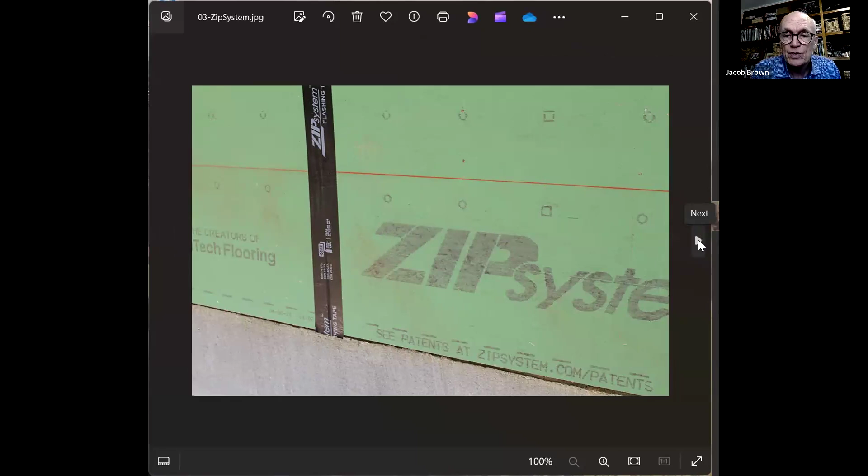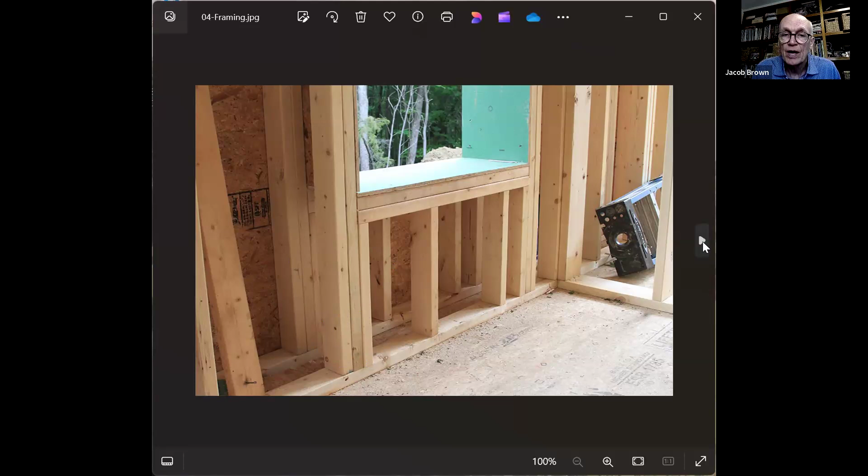The other thing is that the house in Vermont, with new construction, used a double wall construction, two sets of 2x4s with a 4-inch space between, basically a 14-inch thick wall to get a lot of insulation. Those walls were filled with cellulose insulation, and it created a very airtight house and very well insulated.

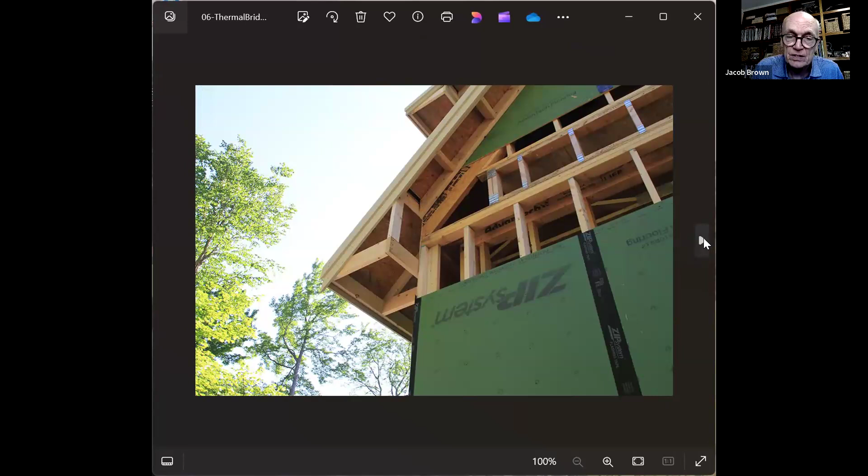I show this picture to illustrate the idea of what's called a thermal bridge. This will be something we talk about a little bit more, but if you've ever watched a house go up, the roof rafters come out and create the eave. But in an envelope house, you cut them off here, put the envelope in place, then you build the eave separately and bolt it in place. Allowing wood to go through the envelope is called a thermal break or a thermal bridge. In passive house construction, you work very hard to prevent those thermal bridges.

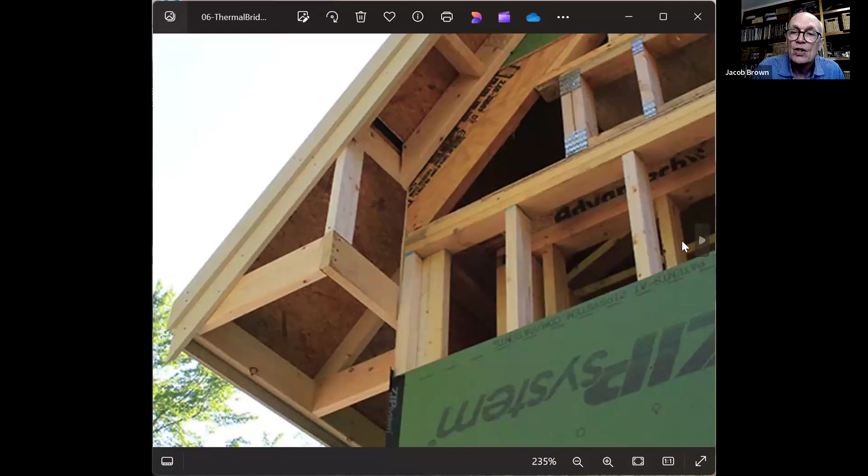The windows are triple latched and triple paned. The doors are the same. The foundation of this house was a prefab built in the factory, so to speak. And this is simply an amazing process. I got to tell you, these guys put this up. They had it all staged.

They'd come the night before to make sure the footing gravel was in place properly. They got there at 7:30 in the morning, and they were taking bets with each other whether they'd finish before lunch. And they finished by about 11:45. You could have started the next phase. It was just an amazing process to watch. These have 6,000 pound cement, so they don't need separate waterproofing.

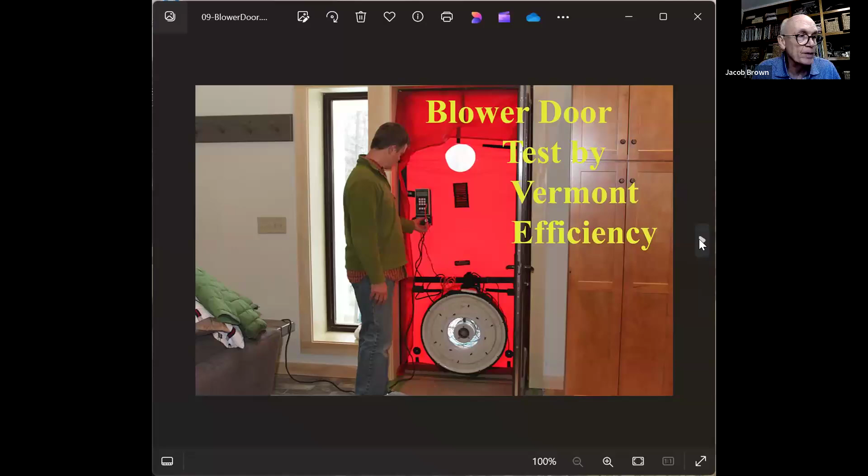We did very well with the blower door test. If you don't know about the blower door test, you might ask me some questions about it. It's a big part of efficiency houses, having a blower door test that does well.

The other piece of it is that it's got to have an energy recovery ventilation system. Zehnder makes the one that we use. It's a Dutch company, and I consider it part of the family. So I say, hey, the Zehnder is really working hard today or something.

It exchanges fresh air from the outside and takes stale air from the inside. It exchanges it in this box, which is almost the size of a washing machine. So the air temperature is then equalized, and you lose very little energy. If it's warm inside and cold outside, the fresh air is heated from the warm air inside. It's basically a thermal exchange. They say inside here is about a football field size of surface membrane to make this exchange. So Zehnder is a big thing.

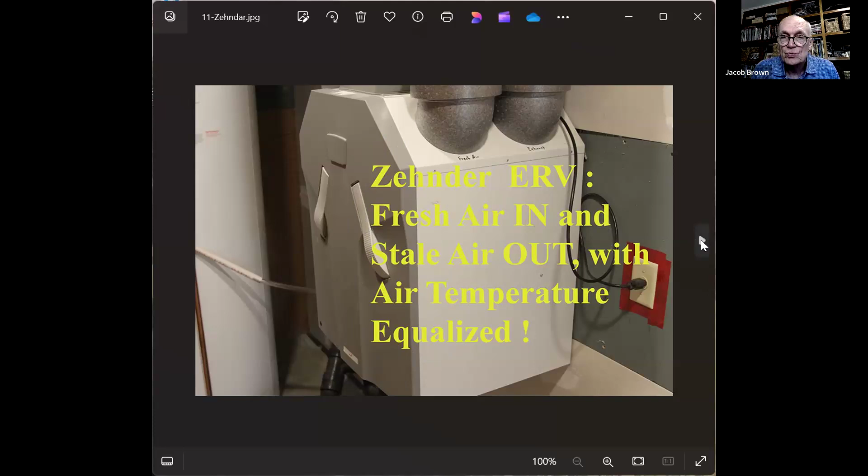And of course, we use solar panels in Vermont to make most of our electricity. The other aspect of the Vermont house that is notable is that it's an open concept house. This is very much different than what we were challenged with in the 1928 Colonial, because you don't have open concept houses. With the open concept house, it's much easier to manage air and have things work well.

Just to go back to Vermont, there's my mom and my dog sitting. What you don't understand until you live in the house, because you build this house and think, hey, it's a neat house, it's going to be efficient, it's going to save money. You live in this house, and it is so quiet because of the thickness of the walls. The air is so clean and the house is so fresh, and there are no drafts in the house.

It can be 10 degrees outside, the wind is going 10 miles an hour, and you're sitting in there having a glass of wine and cheese and crackers, and you don't know it. There's no drafts in the house, zero, none, nada. And we've experienced minus 23 in this house, which I'm not going to go too far into, but it's amazing how well this house performs.

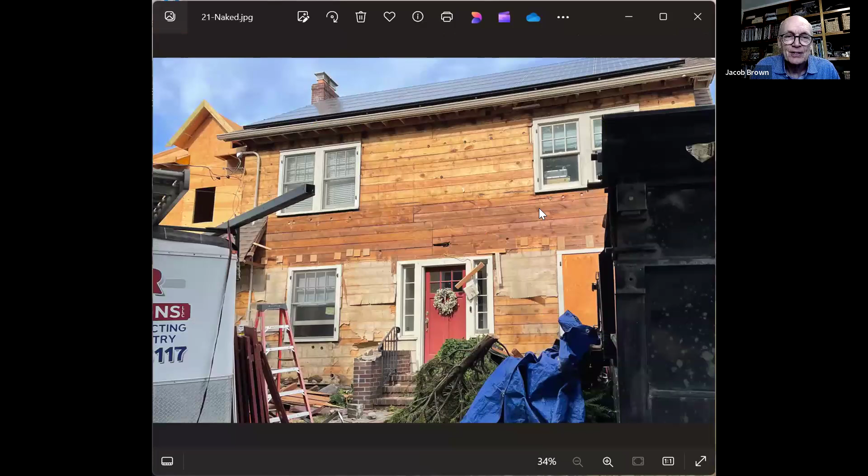we stripped it. You strip everything off it, because in the 1928 house, you make a decision, you're not tearing it down, so you're going to leave the bones in place. You're not going to change the framing like we had new framing in Vermont. So what you do, you strip it and you add the insulation to the outside of the house.

Our house is basically all the way around about 6 inches fatter than it was at the beginning of this process. So you strip it, and notice that it had a nice skirt around it here. See that? And that's gone. And then we wanted the same house back, and this is what it looks like today. It used to look like that, and now it looks like that.

And this might be a first place for a pause for questions if you want. The rest of the talk is going to talk about the process of what it took for us to go from this through that to this. So a moment for a question or not?

There are no questions in the chat, but there's one comment. Christian says he believes that Zehnder is a Swiss company. It might, you know what? I was always told it was Dutch. I'm not sure. They have some competitors out there, and maybe they make them both places. I could be wrong.

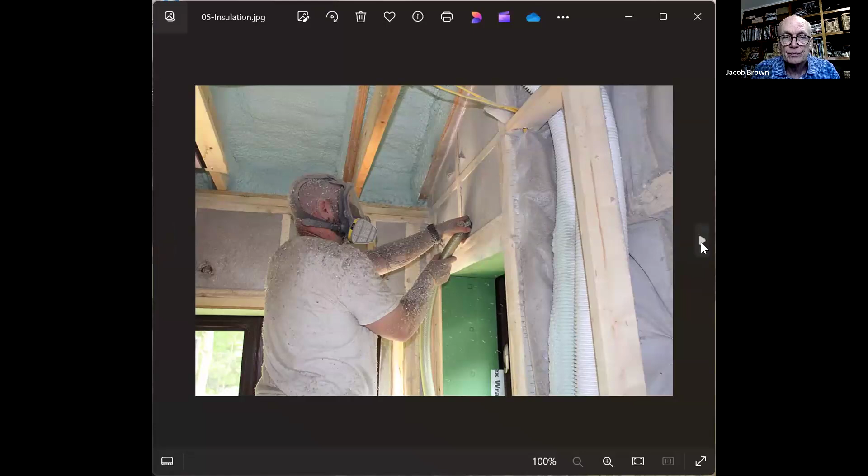Then they came in and slid them like this, and then they pumped the air in from the big truck they had outside. So yes, it's packed: 2x4, 4 inches, 2x4. It's packed with this cellulose. It's quite remarkable, actually.

Brian asks, did you use mini splits? Yes, they're in the Vermont house, 2,300 square feet. We have 5 mini splits. Yeah, and they're ductless mini splits. What ended up happening, we have 2 compressors with this system, by accident, since we were going for Vermont efficiency standards, and we built this in 2015.

At the time, Mitsubishi's compressor that would fit this 5 mini split system wasn't certified to meet Vermont efficiency. So we split it. We bought 2 smaller compressors that met the Vermont efficiency standard. So we got 2 compressors up there. They're still real quiet, but we have 5 mini splits, and they heat and cool. We never use the cooling up in Vermont, but they heat the house nicely.

Robert asks, and I've wondered this myself, with mini splits, how do you heat the bathrooms? That's a good thing about passive house with the air management, because air is exhausted out of bathrooms to the Zehnder, because bathrooms produce the humidity and the smells. So you want the exhausts to go out of the bathrooms, and then the fresh air comes into the bedrooms

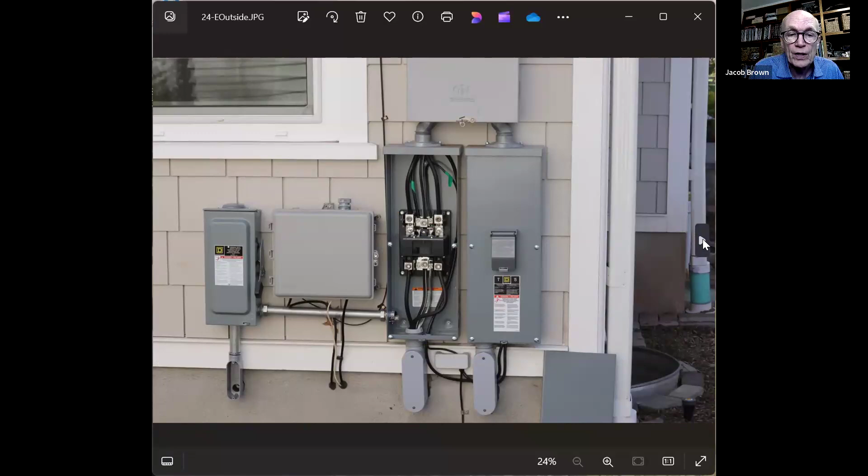I put this in first just to recognize the fact that we went all electric. When we did the project 2 years ago, my electrician couldn't get a 300 amp panel, so we put in 250 amp panels. We probably could have done with 200, but he said, in the future, we already have one electric car. We'll probably get another one. At any rate, that's a recognition that this is an electrified house.

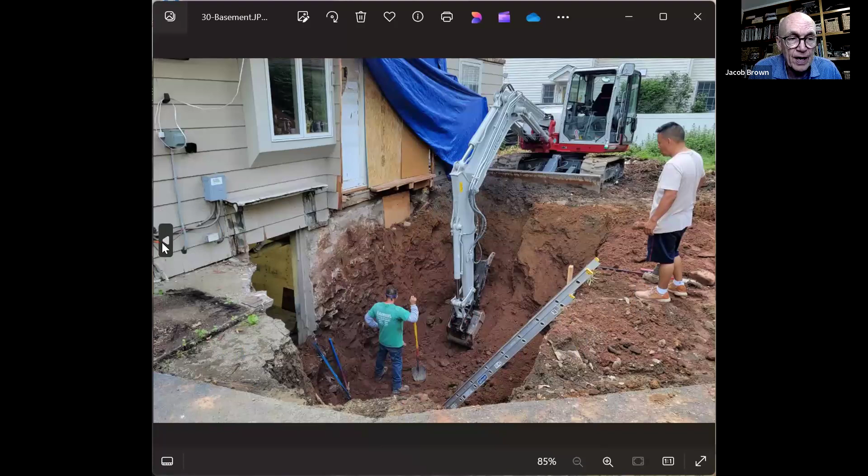And my wife, who's a big cook, has adjusted and actually likes this induction heat surface, so we cook without gas. Now, I'm going to start with the basement. 1928, this was where our problems became interesting. Let's put it that way.

So we renovated part of the house, put in new systems, and we also added to the house, but then we retrofitted the house. We added to the back a little bit, but one of the things to look at, oh wait, I'm sorry, I'm going too fast. We'll come back to this wall. I want you to think about and remember this wall. At any rate, we did the basement.

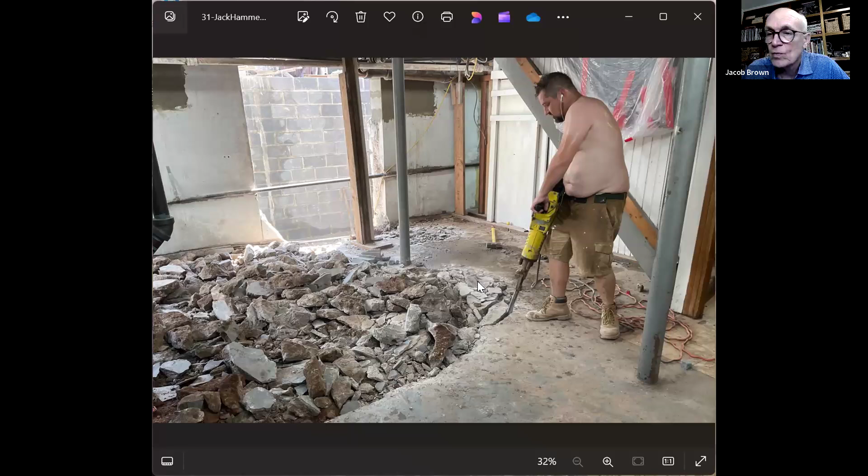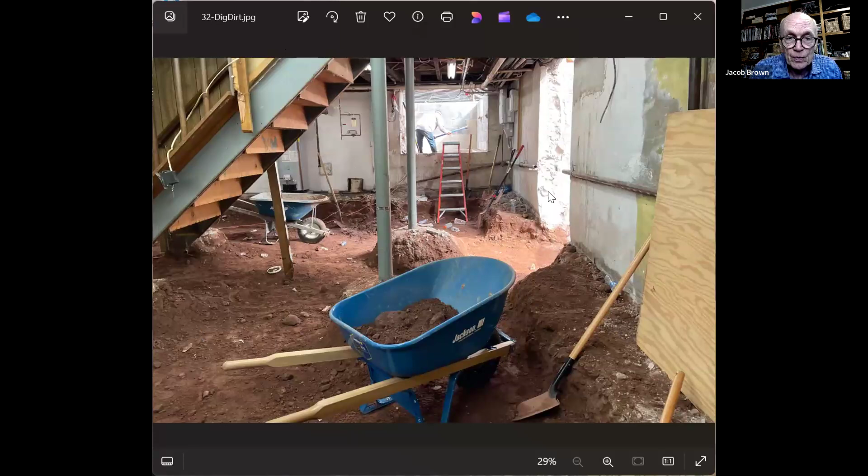Now you find when you retrofit a basement in an old house, you basically have to tear it out and dig it down because there's not enough space to put in the 6 inches of insulation and all you have to do. Fortunately, my contractor had experience in this, and you do exactly what you might think. You jackhammer the thing, and unfortunately, due to the size, they couldn't get a machine in here to dig, so they dug it by hand. His guys were amazing. They dug down by hand.

They found underneath the old floor from 1928 this 4-foot Texaco sign. This is like 4 foot in diameter. It's pretty crazy. It's too bad it wasn't in better shape.

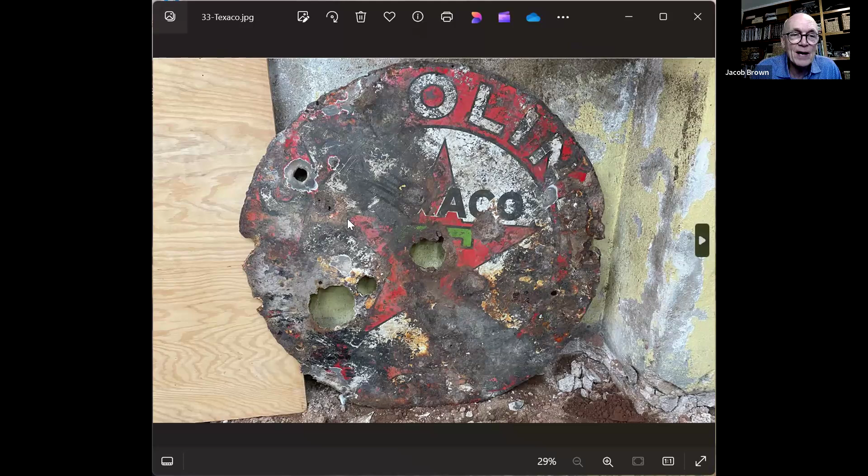Now, one of our first surprises, and maybe the biggest surprise, was that we discovered that this clay, the dirt around the house, is a very firm clay. And the contractor in 1928 basically dug the clay straight down and used it as a form. This is a poured cement foundation, and they used the clay as a form. So what we had was this

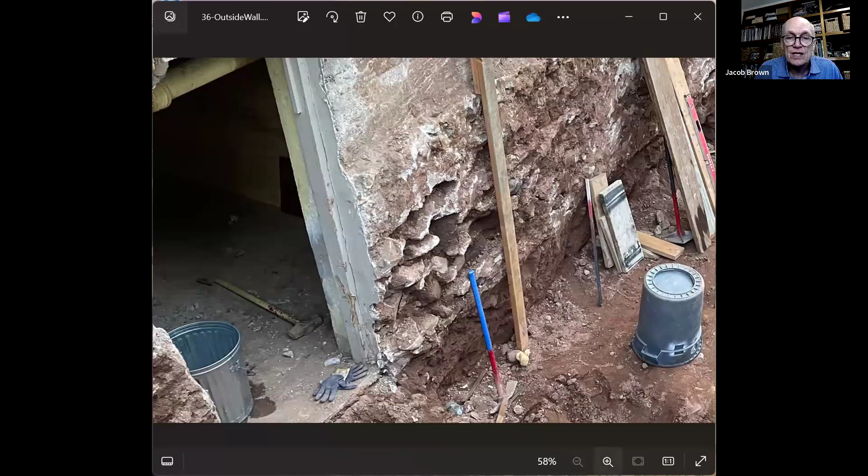part of this wall is just pocked and not very smooth, and will create, as you're going to see in the future here, a real problem for us trying to get the envelope. They also don't have a footer. Notice that. There's no footer. They just plopped the pour on the dirt. Now, the dirt was very firm, but that was all interesting. So you can see that having such pock holes, this was a challenge for the crew.

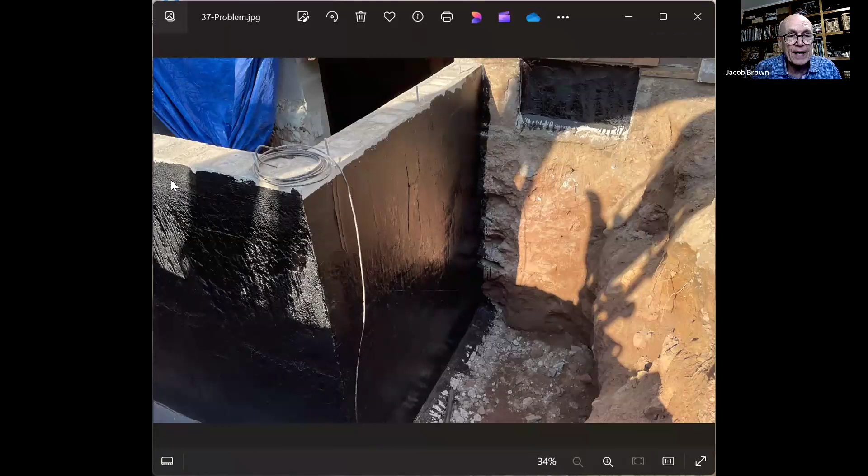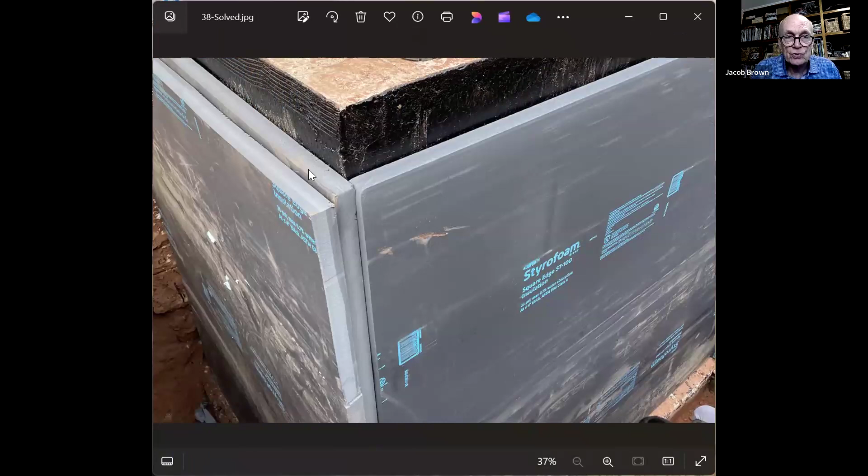What we did when we added to the back of the house, we added a new entryway. So we did that the new way, blocks and tar, and then we tried to blend it with this wall that had all the holes in it. Now, passive house is you tar for the envelope, then you insulate. But where we had all those pocks, holes, we had to pour foam. They poured so much foam in there, it was nuts, to try to make up for that space.

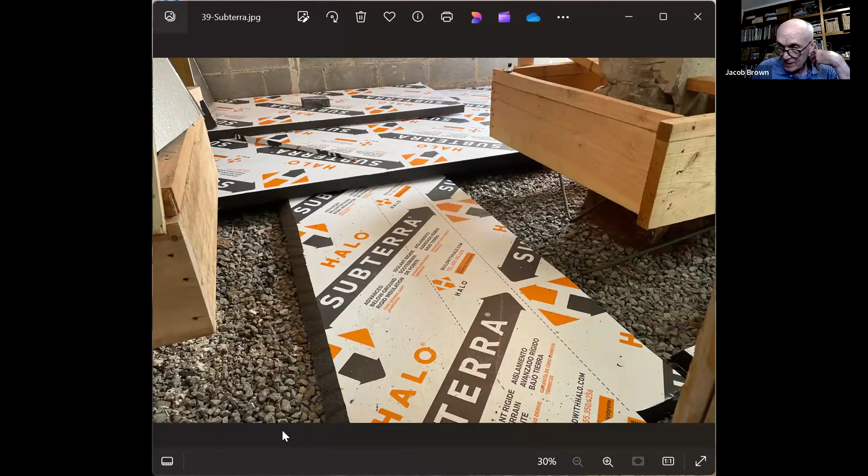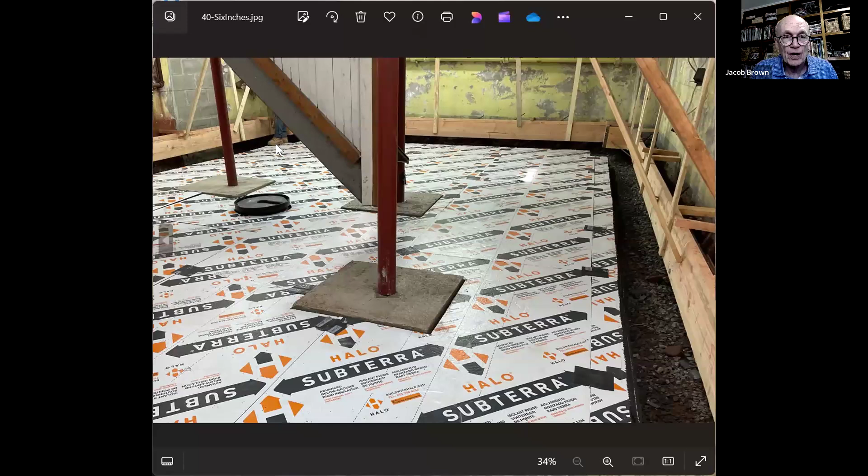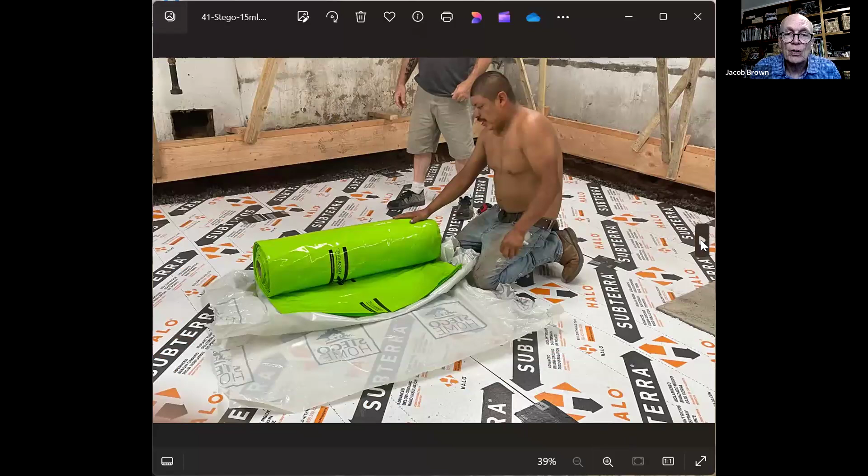Now, once you dig the basement down far enough, you got 6 inches of this Subterra insulator board. 6 inches of this, 2, 2, and 2 on top of your slag, or your stone. We had to do footers for the supports, and because we had to dig below the old line of the poured foundation wall, they basically created a swimming pool for the foundation pour. But before doing that, they needed to do the envelope.

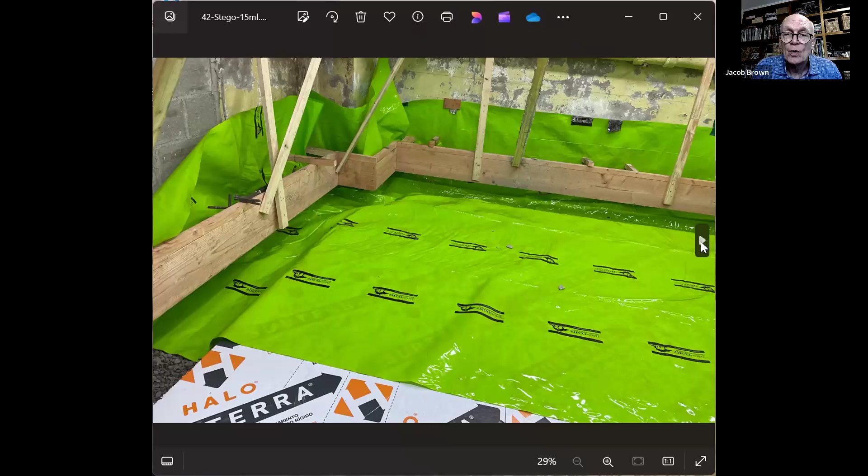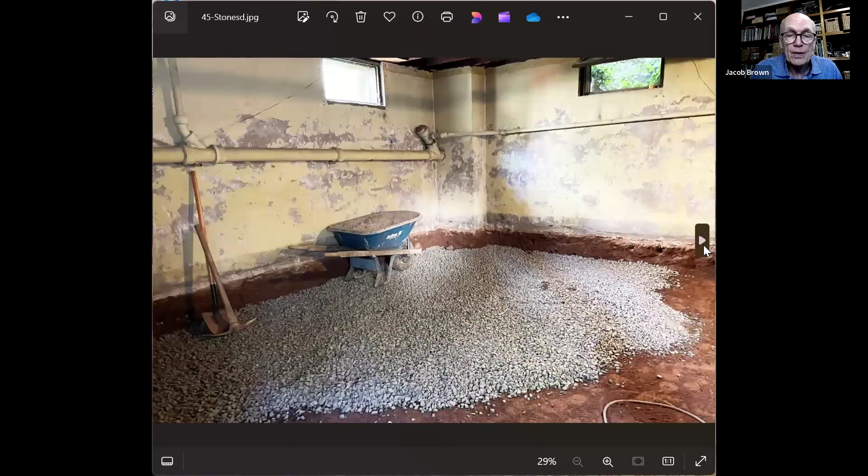So we had this 15-mil Mylar. This green stuff is 15 mils thick. And we basically created a swimming pool with this for the concrete that was going to be poured in later on. And this creates the airtight envelope with the insulation, and then do the standard basement with rebar. And I put this in out of order. This picture should have been a little earlier, but obviously had to have a stone foundation. And then they did the cement pour.

And again, in this small, tiny space, your contractors who do this have to know what they're getting into, because this was a lot of hard work. These guys really just busted it that day. They worked so hard to move this concrete around, and then had to smooth it out and all of that kind of stuff.

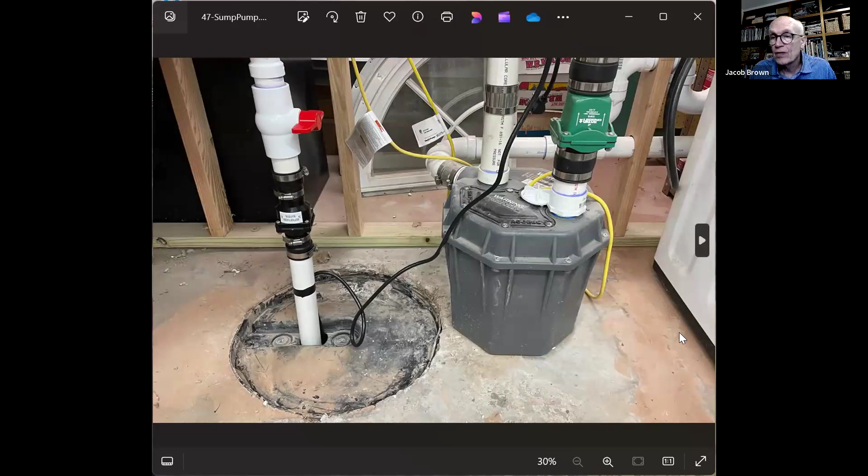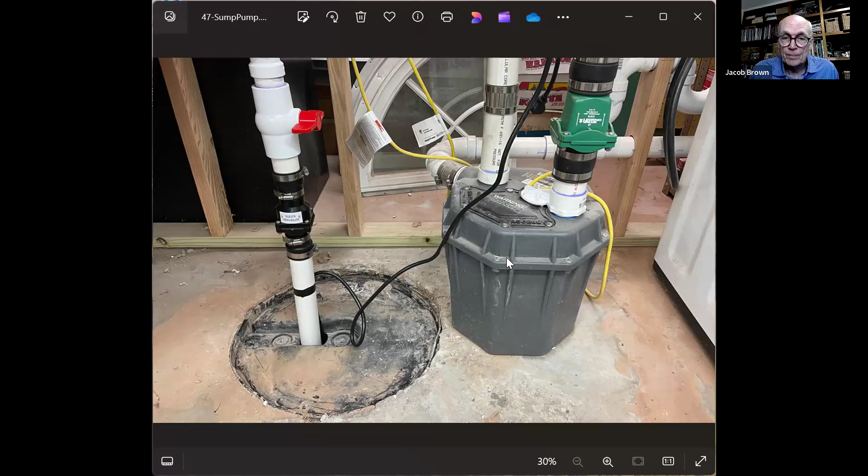The other thing about my old house, and this is an important thing that people need to think about moving forward: this house was below grade from the town sewer system. So it needed to have a pump if you have your laundry down there, which we wanted to do, and we needed a sump pump. We'll talk about sump pumps later in terms of passive house, but this was all because the house was below grade, and part of that was getting rid of the water. So we have all the

downspouts, and this house basically has a higher backyard, and my neighbors behind the house are higher yet. So the water from a good rain will run down to our backyard. And I've got drains in the backyard that also connect to the downspout drains. And when we have a good rain, we have a good bit of water coming out of the pipe in the front of the house. So that's something else that people need to think about.

And since we lived there, I knew all about this water issue moving forward. But if you have a property where, as they say, the drain pipes can go to daylight, and you don't have to do the below grade equipment, it makes life a lot easier.

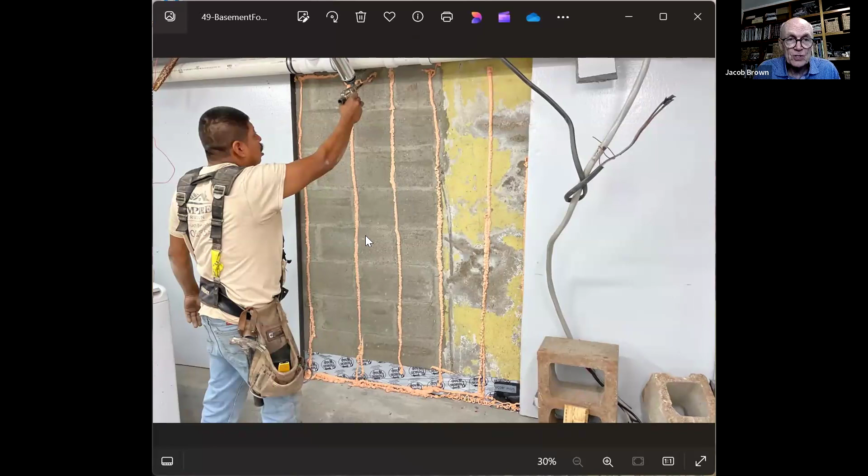Then once you've got your basement floor done, you're going to also insulate that wall. You got it insulated on the outside, and you had a 2-inch foam board on the inside. Okay. So this gets people thinking about the basement, okay?

And I thought, didn't we say I'd take a few questions at the basement time, if you want, before I go to the walls of the house? Or should I just, what do you think? I don't think we have anything. Okay, all right. So I'll do the walls now, and then people can be thinking about it.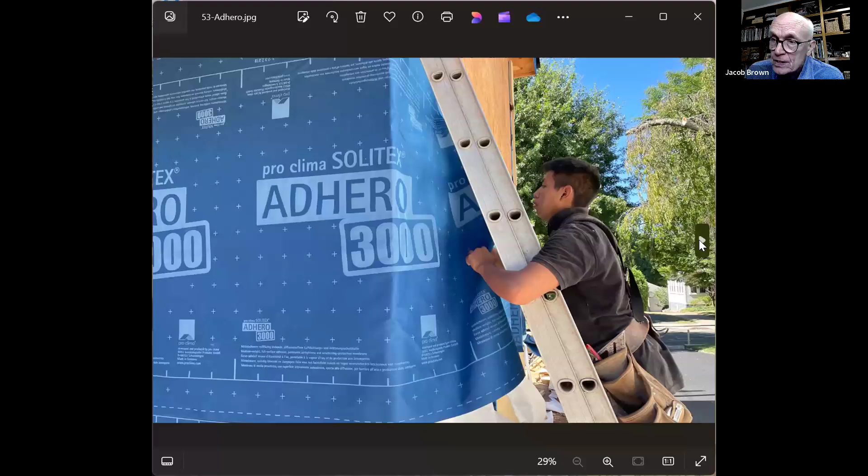And then for the envelope, and this is different than what they did in Vermont. Remember, they used the ZIP system of plywood that's basically airtight. Here they use a material called Adhero 3000. It's pretty thick. It's glued on a backing, and you strip it off, and then you put it over the house. You basically wrap this house in this material called Adhero 3000. It's quite impressive. It's pretty thick.

And it was hard work for these guys, in order to take the backing off and then smooth it out all over the place. It was really quite interesting. They worked hard, and I just watched and took pictures, but they were working hard to basically wrap the house airtight. The idea is we're making this house airtight with this blue Adhero.

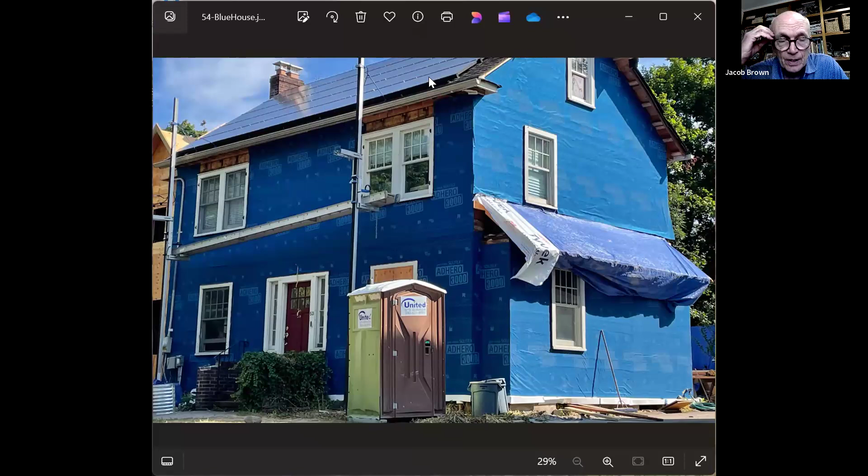Now, at this point, we hadn't changed the windows. These are still the old windows and doors, and we hadn't pulled the roof off yet. As an aside, I had solar panels on this house since 2010. And unfortunately, as part of this process, I had to have the panels taken off, and that's another whole story. But the panels had to come off, but we haven't done that yet either.

The other thing to notice, for people who are curious about this, wait. Notice my eave here, right here. And if you remember, I showed you an eave from Vermont where they tacked the eave on, they bolted it on and didn't have thermal bridges. We didn't do that here. I'll talk about that later, but this shows that we left the old eaves on here, although we pulled the skirt off here.

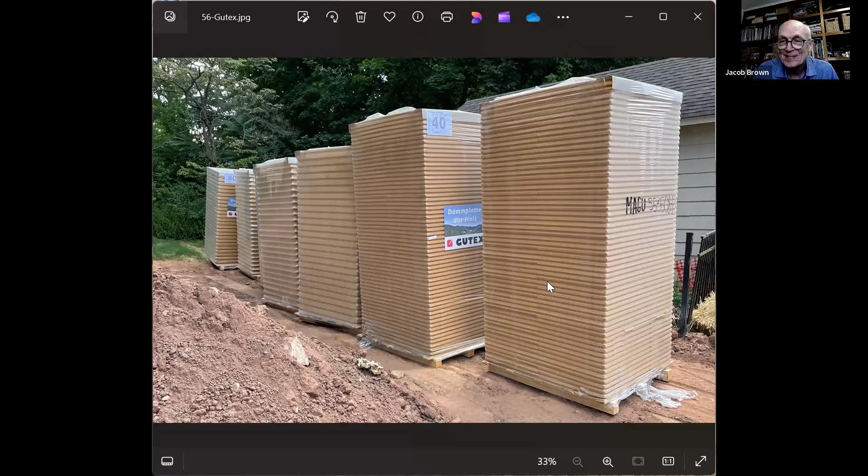So now we've airtighted the house. Now we got to insulate it, and we use a product called Gutex, which is a wood fiber product. And insulation takes a lot of space. You should have seen bringing it in on a truck. This wasn't very heavy, but boy, it took a lot of space. So they brought all this Gutex in, and they wanted 5 inches. So they had 2-inch pieces and 3-inch pieces. And basically, it was putting a big jigsaw together on the house for the workers who did it.

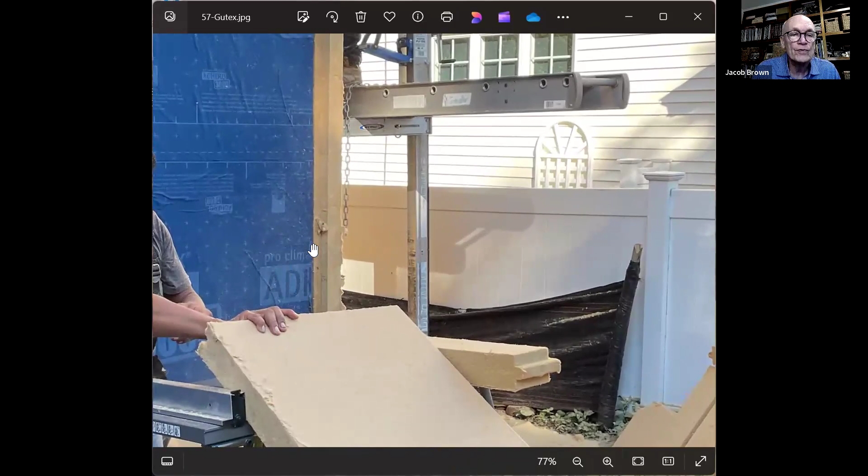And again, there's Feliciano working. Sometimes they'd have to cut it and get it just right. Here's kind of the corner of this construction, but I got some other pictures that'll show how that looked.

Now, one of the things we discovered that we hadn't anticipated was that we wanted a certain shingle look with Hardie plank, and the energy model said we'll put furring strips up and put the Hardie planks up. Fine. Well, Hardie planks can't go on furring strips, we discovered, so we had to put another layer of smooth plywood on the house. So the house got kind of doubled up in a way, because it needed a smooth surface to look okay.

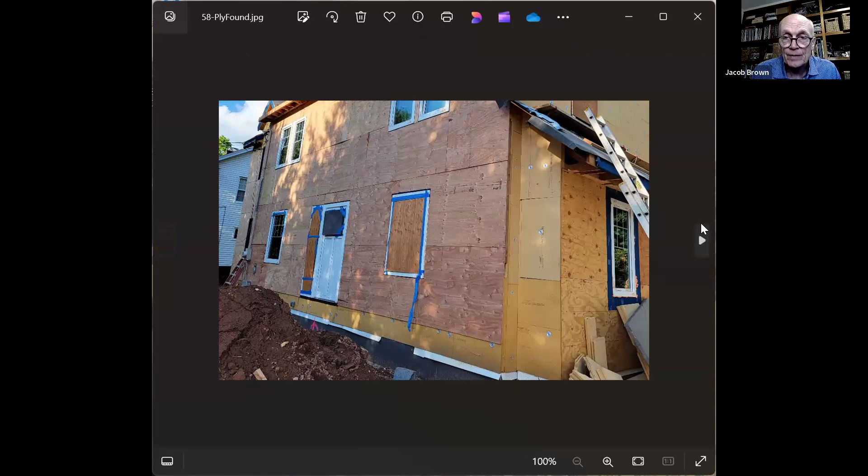And then Hardie planks need what's called a drainage plane. So my contractor looked into it. We'd already developed the use of this Adhero 3000, so we just did it again. They made the house blue again with the Adhero 3000. So here's the second time blue. And this was after they put the windows in. Now they've got the windows in, the door in, and the second time blue, and now we're ready for the Hardie plank.

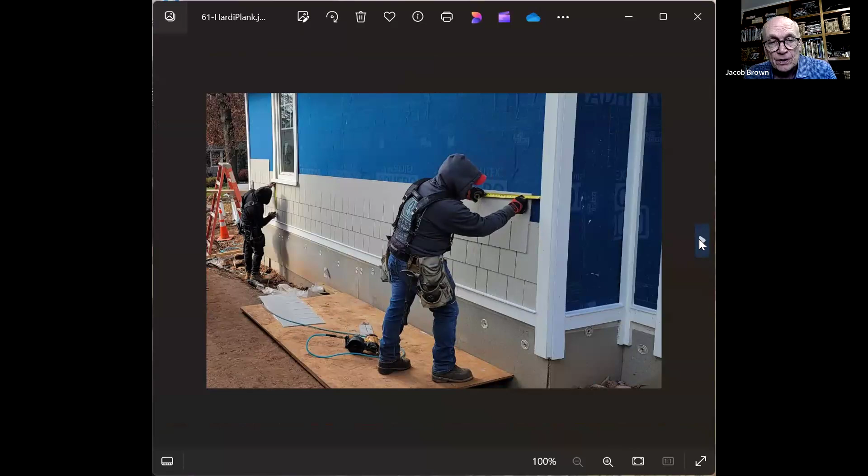And this is pretty cool stuff. Hardie plank, you never need to paint, you never need to do anything. It looks awesome. We have Hardie planks in Vermont, 2015. What's that, 9 years ago? Looks like they were put up yesterday. You never have to do anything to them. It's pretty remarkable. So here's our Hardie planks.

Now, the other thing that might generate some questions: how do you deal with the windows? Because this is the window before the insulation was put on. And you're making the house 6 inches thicker, well, everything else about 6, 7, or 8. Where do you put the window? Do you put the window inside or outside or in the middle? And there's a debate in Passive House envelope when you really geek down to it as to where to put it.

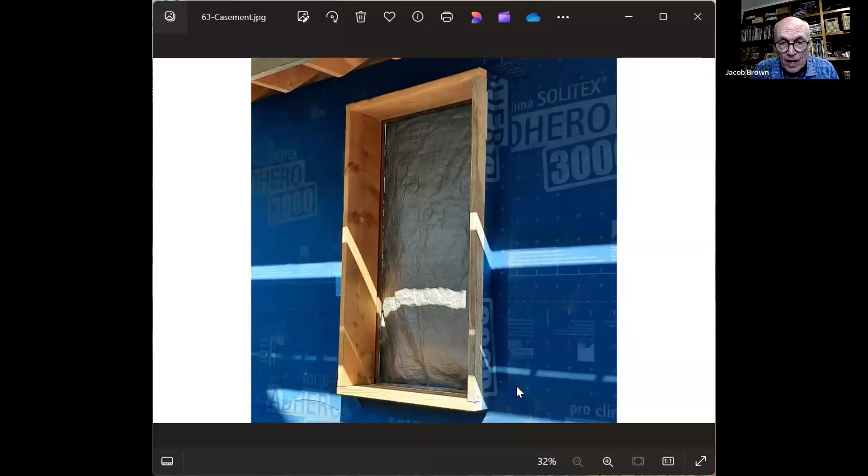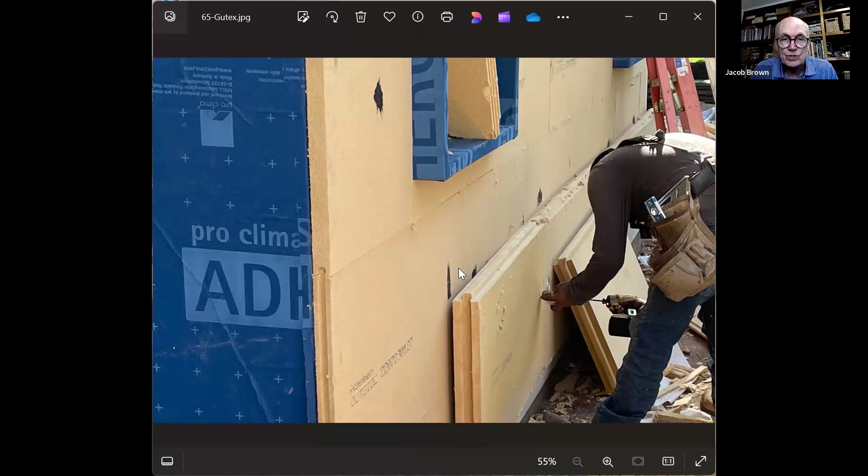Well, we wanted the look of the window on the outside. That's what we had in Vermont, and it gives a neat windowsill inside. So the contractor had to create basically a window box so that the windows could be supported properly outside the framing of the house. And that created an interesting additional thing that they had to put the envelope around. And this is another picture showing how they put 2 inches, then 3 inches, and Adhero around the window box.

The other thing interesting about the windows, you use window clips. These windows are very tight. They're triple seal and latched all over the place, but they need to maintain their integrity in terms of being 90 degrees and all of that. So you can't put a screw through the frame of the window. So they use these clips to basically allow the window almost to float in the box. So if there was a warp in the box or the frame of the house, it's not going to affect the window and the integrity of the window.

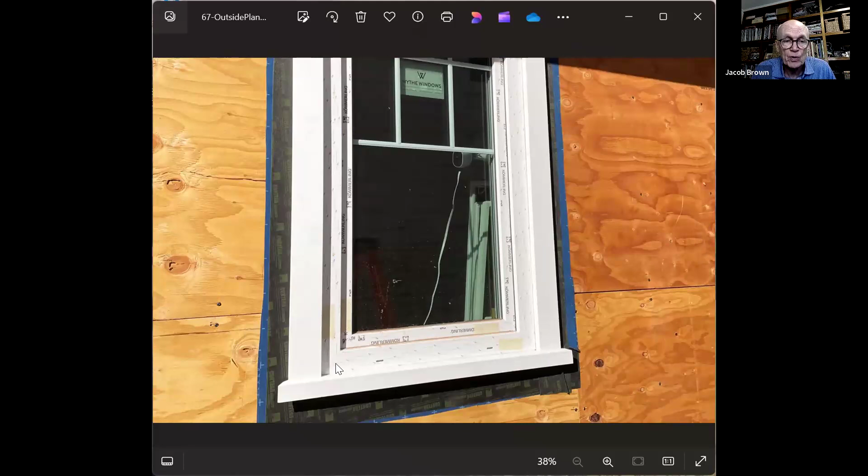And Wythe Windows, where we got the windows, had a little seminar for the workers from my project. They went up to Wythe and learned to make sure they get it just right. And then the window is put on the outside of the work that we're doing. And again, when finished, the window is outside. We wanted very much to have the same looking house. And what this does, it creates a neat little windowsill inside the house, which you can put things on if you want to.

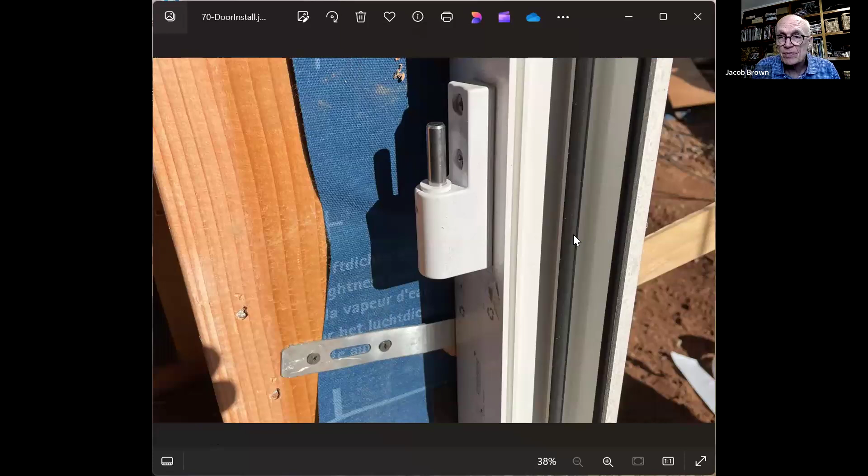Doors, same thing as the windows. They take the door off and then they use the clips and they put the door in place and they put the door back in place. Triple seal, 1, 2, 3, and latches all around. Where's my latch?

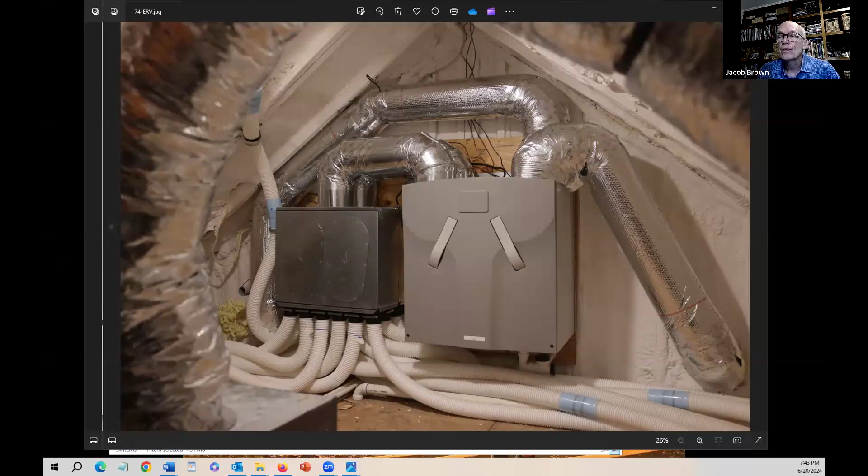All right, so now that's the Zehnder. We've talked about it, whether they're Dutch or Swedish, I actually don't know for sure. But what was fun was the HVAC guy had worked for my contractor for years. He'd never installed one. And he had fun. He would come to work in the morning and say, I was watching videos last night and I'm reading up on it. And he and his son would go up there and they made it work. They learned how to install one of these things. Go ahead, Steve, give me the next picture.

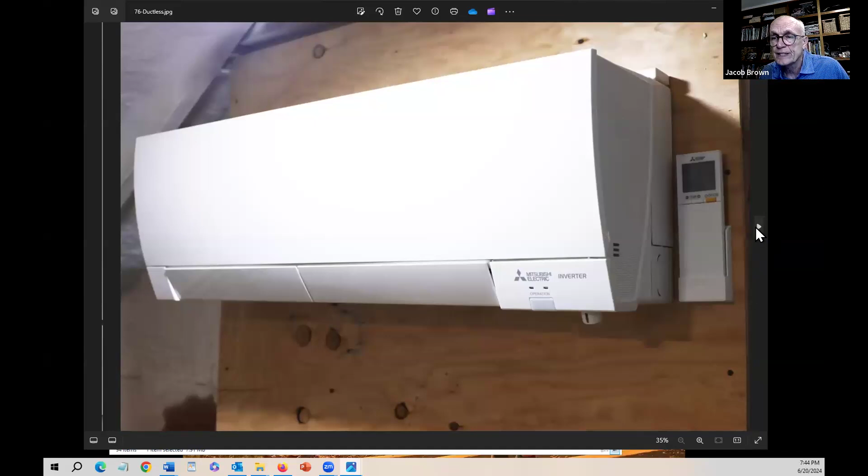I mentioned in the Vermont house, because of the open concept, the ductless mini splits on the walls worked well, but here we needed the addition of ducts. Go ahead, Steve, give me another picture there. And see, here's the traditional ductless mini split that sits on the wall. We got one in the attic and one in the basement. Go ahead, Steve, do the next one also.

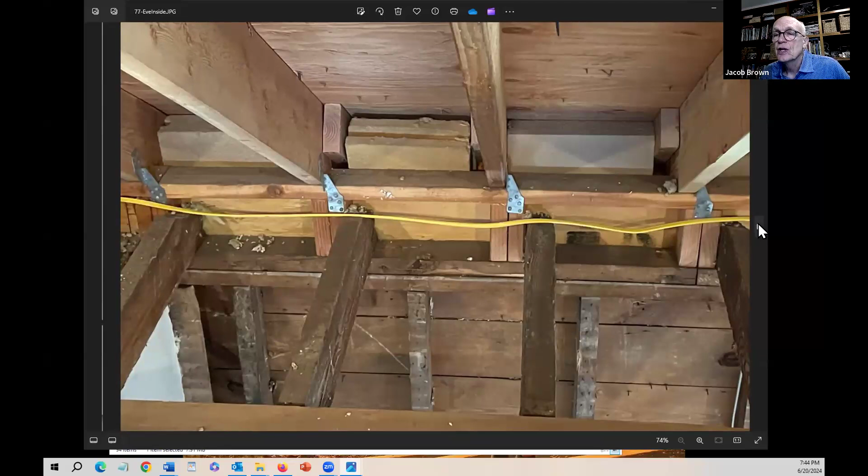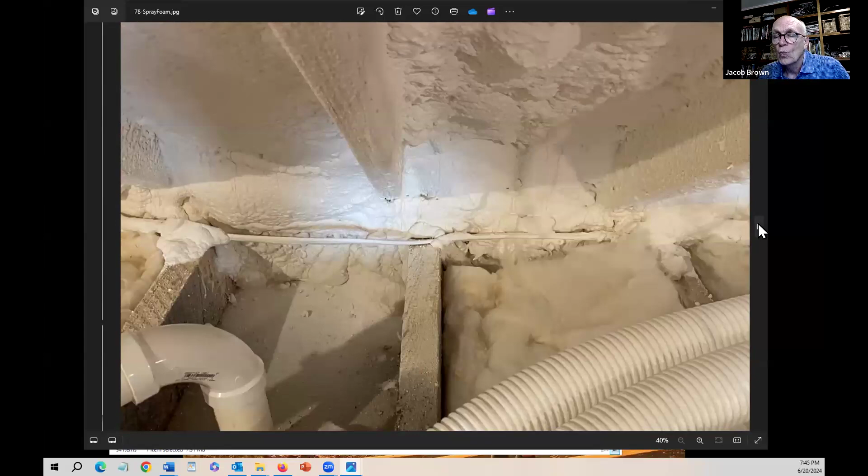Now, here is a big challenge. This is the seam between the house wall and the eave of the roof. And it doesn't take much to look at that and say, that is a mess. And we had a real challenge trying to get the envelope to work in this spot. Go ahead, hit next picture, Steve. One of the things we did, of course, was to use spray foam insulation. And one of the things spray foam does, it fills holes. It helps create your envelope.

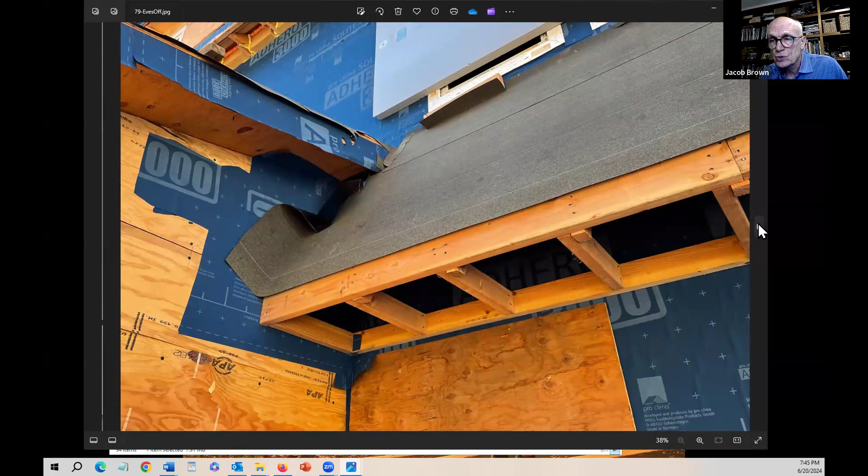It doesn't just insulate the space, but it fills the holes. Go ahead, Steve, with another one. Now, here, I use this picture to show, I'm sorry I can't have my cursor on it, but you can see this is part of the skirt that we stripped off the house, and then we built it and bolted it back on the house after you had made the house the envelope. See, here's the Adhero underneath, and you can see the same thing with the next picture, all the Adhero underneath, and you build it out.

Now, interesting thing with this house, and if anybody gets involved with this kind of thing, there's a real question in the business. Do you cut the eaves of the roof off and redo them? Or do you leave them on and adhere around them? Our energy modeler went for having the guys put this Adhero around these eaves, and they were up on high ladders. They worked like dogs.

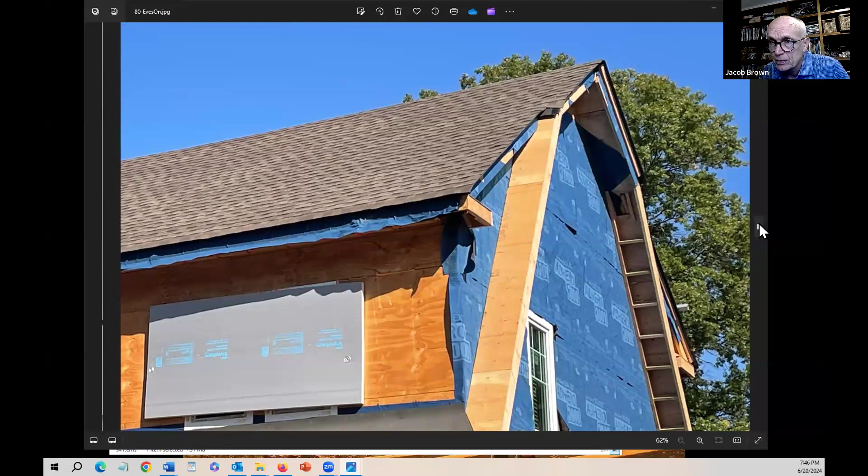Go ahead, hit the next one. And I'm not so sure that it was the best way to go. My buddy in Central Jersey, he had his eaves cut off and the envelope made just tight around the house. Who knows which is best, but it's two ways to do things out there. Now, once the roof was ready to go,

I think based on the time, I should just go through the roof and we can do questions all at once at the end. What do you think, guys?

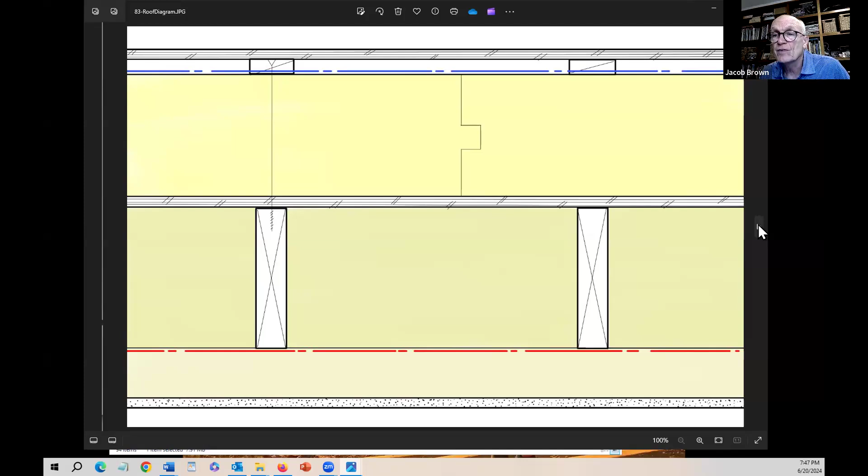Again, 6 inches, this was a roof diagram for those of you who want to come back and geek out on this diagram. It's got insulation between the rafters, and it's got lines here as to where the envelope is, and you got furring strips. Go ahead to the next picture, Steve.

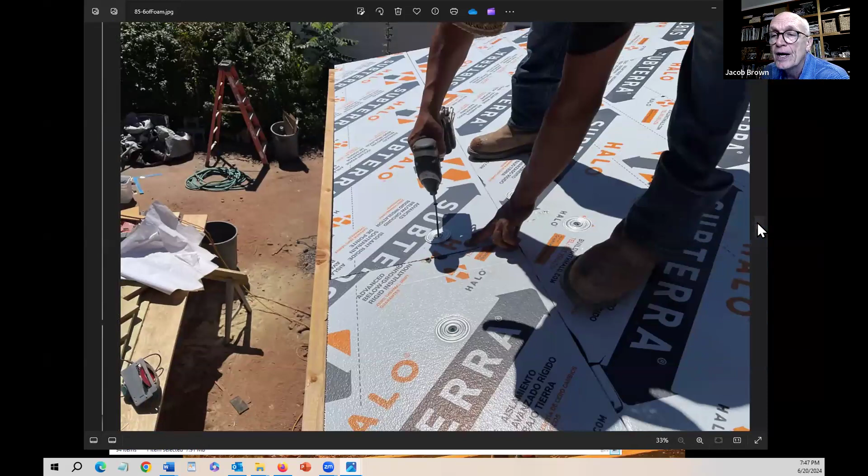One of the things they did, if you look closely at this picture, you can see they created a rim around the roof, as a way to have the 6 inches of insulation sit in its place. Next picture. And the 6 inches, here he is, he's using these long screws, like 10, 12 inches long, with big washers to hold the screw in place, and they would drill them in and have this highly insulated surface over the top of your roof. Go ahead with the next one, Steve.

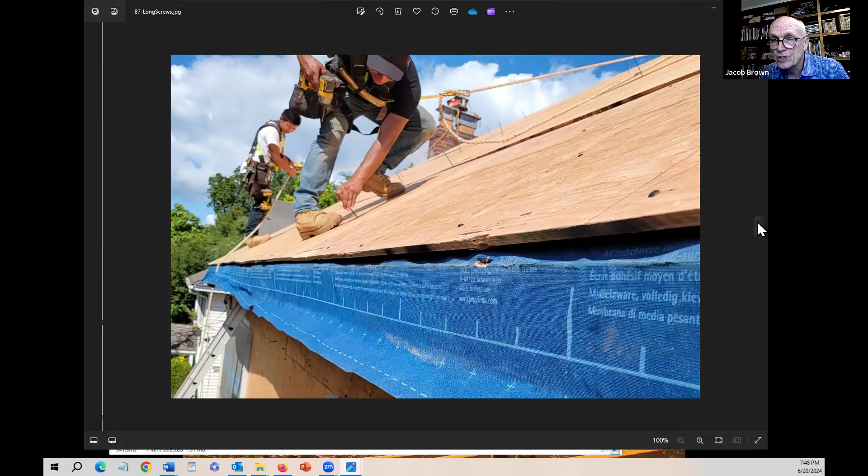Once they did all of that, then they had to put down furring strips, and then the plywood over the furring strips, because you got to have a surface for the shingles. And you can see the very long screws. Go ahead with the next picture. Very, very long screws. The guys were all roped up. And you can see again how we had to have the Adhero come down and wrap around the eaves.

Next one. These furring strips had to make sure that the nails from the roofers didn't penetrate the envelope, because that's the other thing about these constructions. Once you start putting your envelope in, you have to minimize what we call penetrations, how many holes you put in your envelope. So obviously you got all those roofing nails. You had to have that space so that the roofing nail didn't penetrate. Go ahead with the next picture.

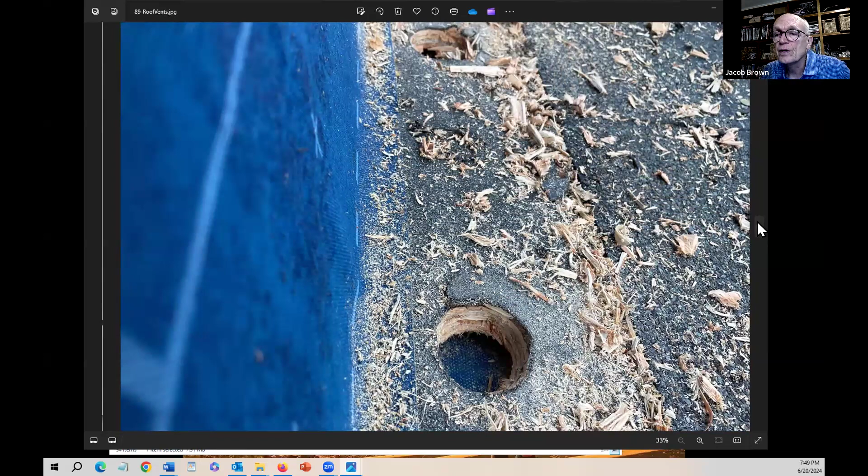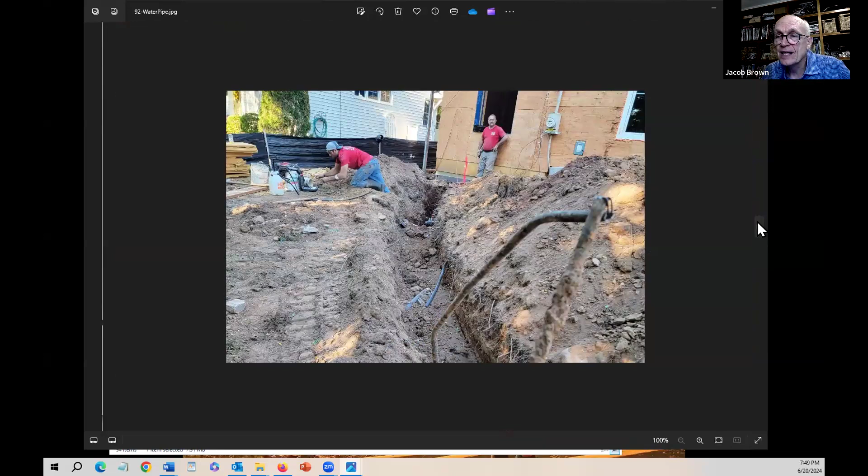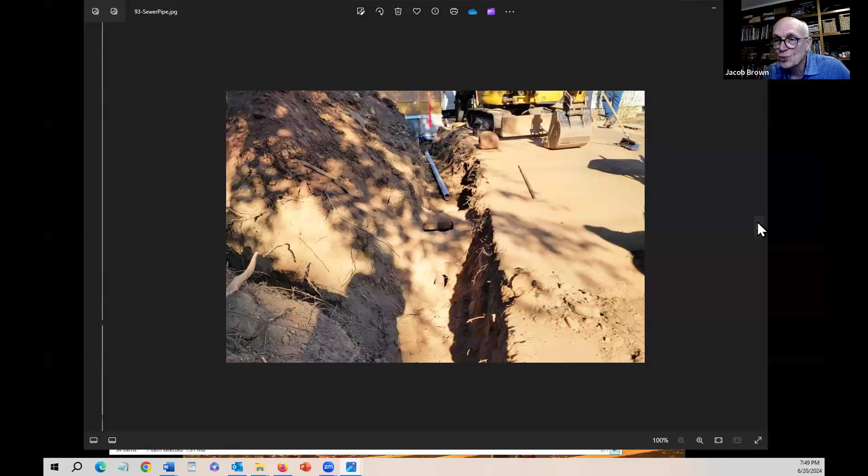You also needed a couple of spots, this was on the back roof, they had to create some holes to allow moisture movement. Go ahead for the next one. Has nothing to do with retrofit passive house, but the renovation of 1928. We needed to replace the water line to the street. Next slide. We needed to replace the sewer line to the street. Next slide.

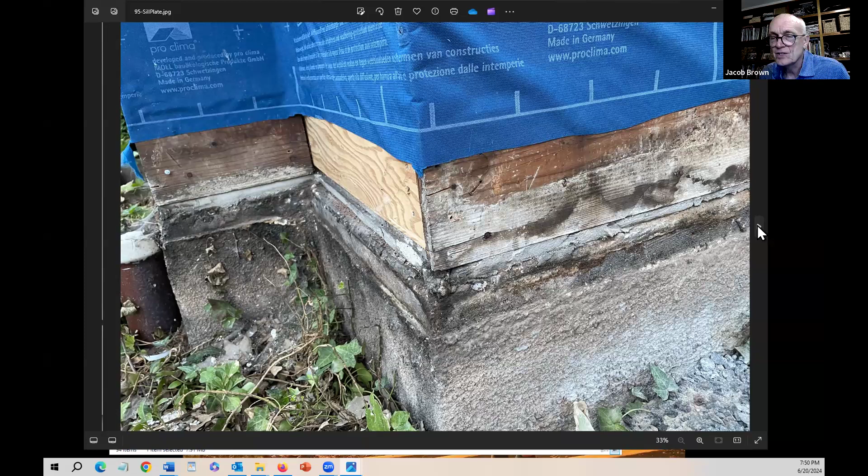Thank you. So we put Adhero down, and if you remember back to the foundation part, we used a lot of foam. We used that insulator board, and we tried to connect the envelope from the exterior basement wall to the house wall. Since we haven't done our final blower door yet, we're not quite sure how successful we were. But go ahead with the next one. Couple of issues that we had with our house.

This picture I use again to just reiterate the challenge of the basement. 1928 house, no footer. The dirt was the cement form, and then the foundation that you have to get rid of so you can go down far enough to get the insulation that you need. Go ahead.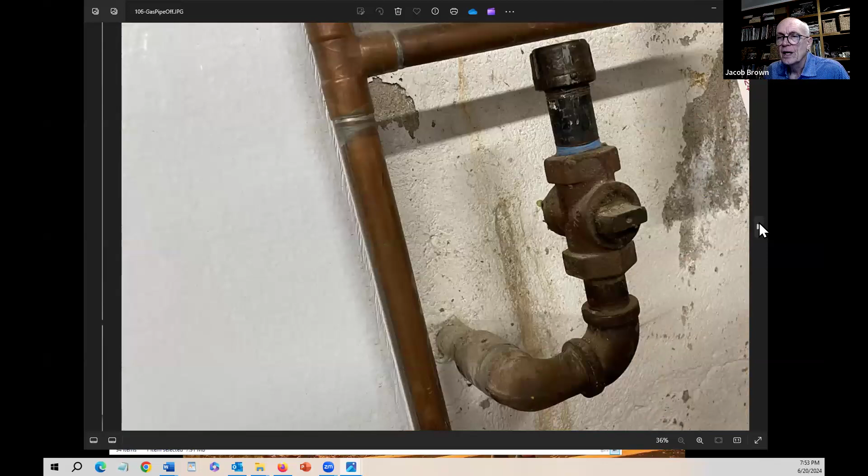And now, this, of course, is part of the retrofit, and it's symbolic. That's our gas line. We've turned it off and capped it. I talked to the plumber about it. Didn't make any sense to try to tear it out. It's there for the future, but I don't think it'll ever get used. But it is kind of symbolic of the project, if you will. Go ahead to the next one.

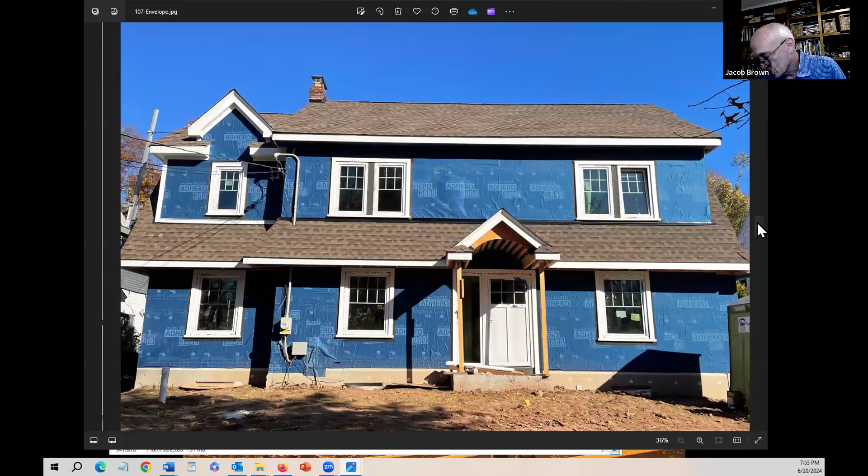So the enveloped house, this is kind of a summary: no carbon, gas pipe off, the enveloped house, and then hit me with the next one, lots of insulation. And you've got this amazing house ready to go. Now, moving forward, I'm kind of coming to the end of my remarks here. Hopefully you guys got some questions, but go to the next one, Steve.

We haven't done our blower door yet. And we'll see what that turns out to be. But blower doors, I suspect a lot of you watching know about blower doors, because new construction of any sort is starting to expect a decent blower door number. You don't have to be a passive house aficionado to want a house that is efficient and doesn't leak too much of the nice heat or cool air that you put in there. So having a blower door that is pretty decent is important. Go ahead to the next one.

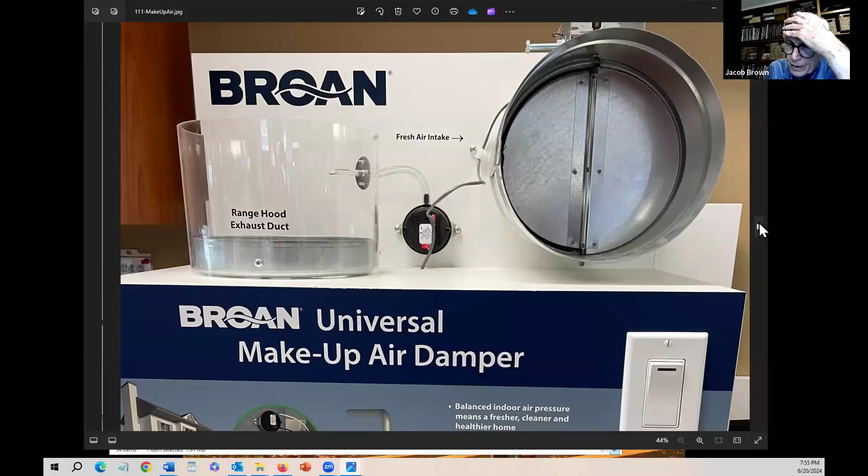And the other thing I don't know about this house yet, we haven't lived with it enough, is whether it'll need a makeup air device. Our Vermont house is so tight that it needs makeup air just to allow the stove fan to work. If people don't understand makeup air devices, you can ask me some questions about it. We're not sure until we get the blower door, because right now the fan above the stove works well enough without the makeup air, and it might be we won't put a makeup air in this house. Go ahead with the next one.

We still have our driveway to finish, and however, go to the next one, because we love this house. This house is fully functional right now.

But let me reiterate, people say things to me like, well, will you ever make up the cost, et cetera, et cetera. And I say, I don't care, because guess what? The first day this house got turned on, we get to live in the house. And until you actually live in one of these houses, you don't understand, is the best way I can say it.

And I had an interesting experience. I mentioned at the beginning of the talk that a friend of mine worked for Wright Builders, his name was Roger, he was my connection to Passive House. He's a skier, and I guess it was 2 years ago, he needed to come to Mount Snow and go to a clinic. And he came to our house and he stayed for a couple of days.